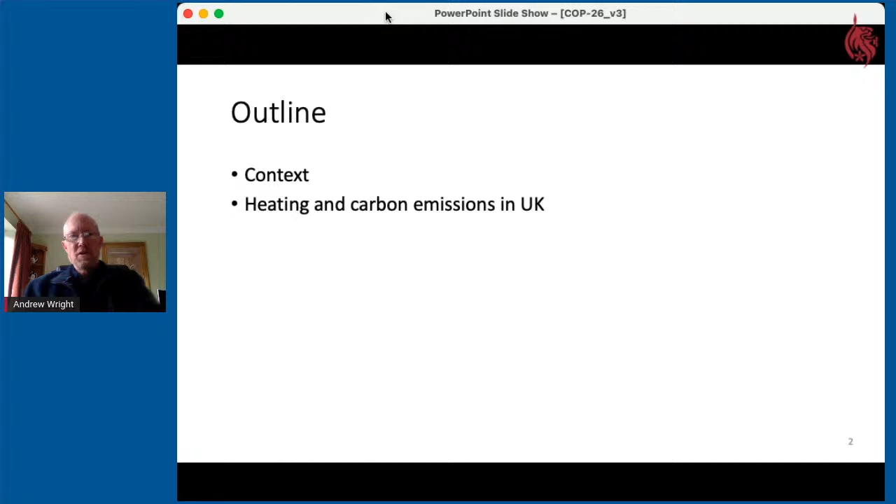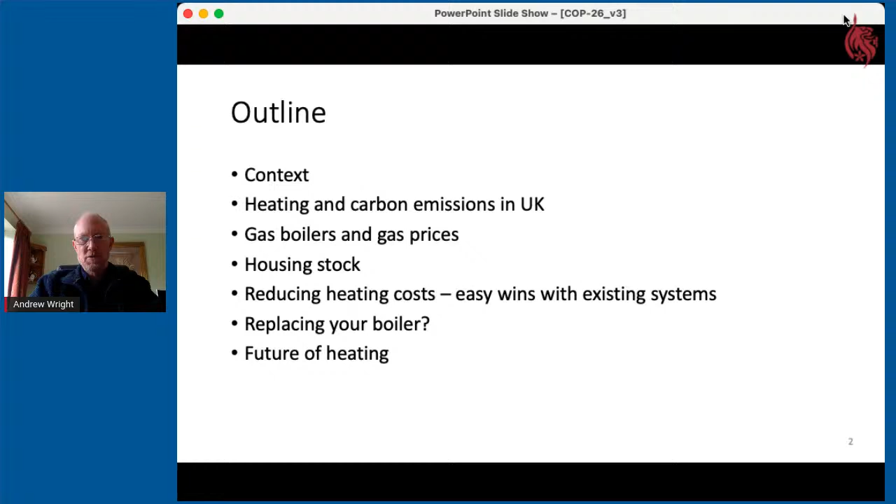First of all, I'm going to talk about the context of all this: heating and carbon emissions in the UK, gas boilers and gas prices (very topical), a bit about our housing stock in the UK, how we can go about reducing heating costs with simple, easy things to do, and the big question of whether to replace your boiler. Then a little bit about the future of heating, possible new systems we may be using in a few years' time.

So to set the context, COP26 starts on Sunday in Glasgow, and there are two big issues here. The first is the fact we have seen, particularly this year, massive impacts of climate change on the world: terrible fires in North America, heat waves in Canada, very dramatic flooding in Germany and China, and other places. So we really are seeing some very worrying and big effects of climate change.

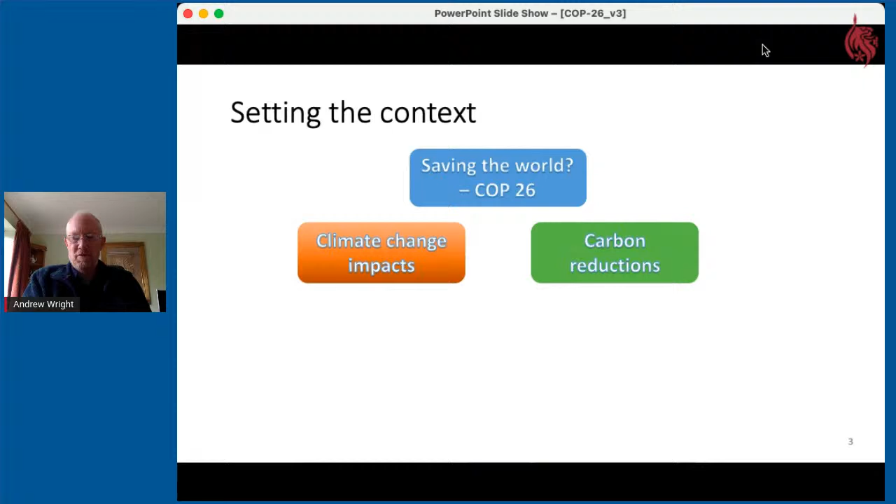On the other hand, in order to limit climate change, ideally to, or at least to, a 1.5 degree increase in temperature if we can, no more than that - but it's not looking very good at the moment. So the carbon reductions needed to reduce the further effects of climate change is a big thing for COP.

And then on the other hand, we have our dependable gas boilers, we have an inefficient housing stock, and we have a massive increase in gas prices in the last few weeks, even since I agreed to do this talk. In fact, I didn't realize how appropriate the title was going to be.

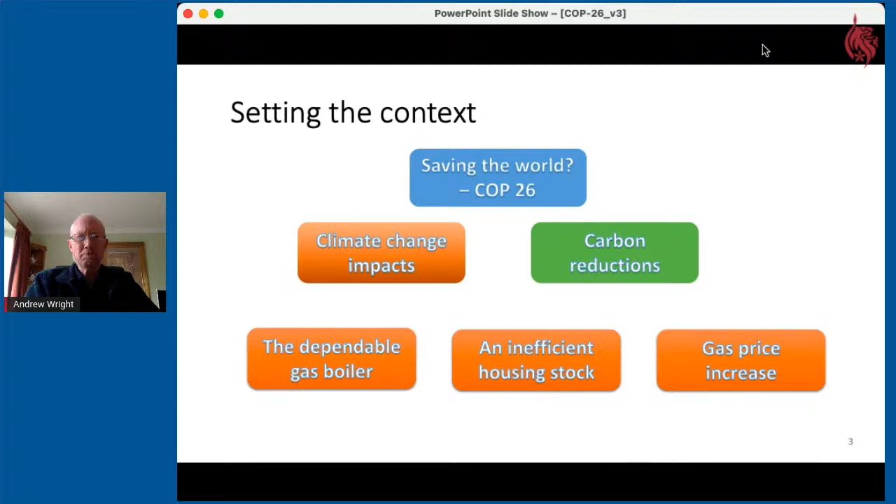So the UN Framework on Climate Change, UNFCCC, has its meeting, the Conference of the Parties, the COP, in Glasgow, and in some quarters it's seen as almost a last chance to agree cuts to limit climate change to 1.5 degrees by 2100.

So climate change is driven mainly by greenhouse gases from the activities of man, mostly carbon dioxide from burning fuels, but also methane and other gases contribute to it as well.

The UK has a target of 78% reduction by 2035 and 100% reduction by 2050, which is really challenging. We just heard, I think yesterday, that the atmospheric concentration had gone up to 413 parts per million. That compares to 280, the long-term pre-industrialization natural level. And despite a slight fall in emissions due to COVID last year, the actual amount in the atmosphere is still increasing.

And a significant part, about 18%, is from buildings, and that compares with 23% transport, 10% electricity, 10% aviation. That's 2019 data, so not influenced by COVID.

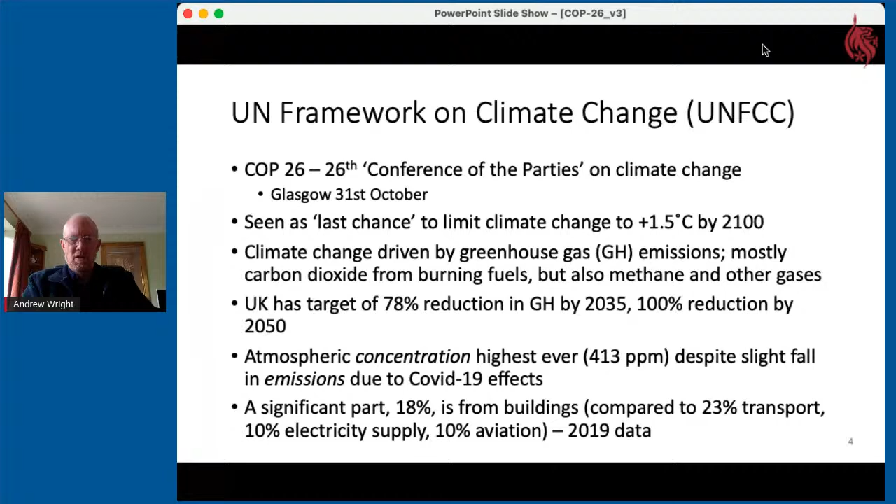If we look at that graphically, the red dashed line is electricity supply emissions, and that has reduced quite steadily and dramatically since 2000, mainly because we've closed coal stations and replaced them with lots of wind generation and a significant amount of solar now.

Buildings, the purple dashed line, is reducing much less, mainly through improved gas boilers and some improvements in the housing and building stock, but that's only reducing slowly and is now 18%. The blue line at the top is transport, which is staying pretty flat, but may reduce quite sharply as we go towards electric cars.

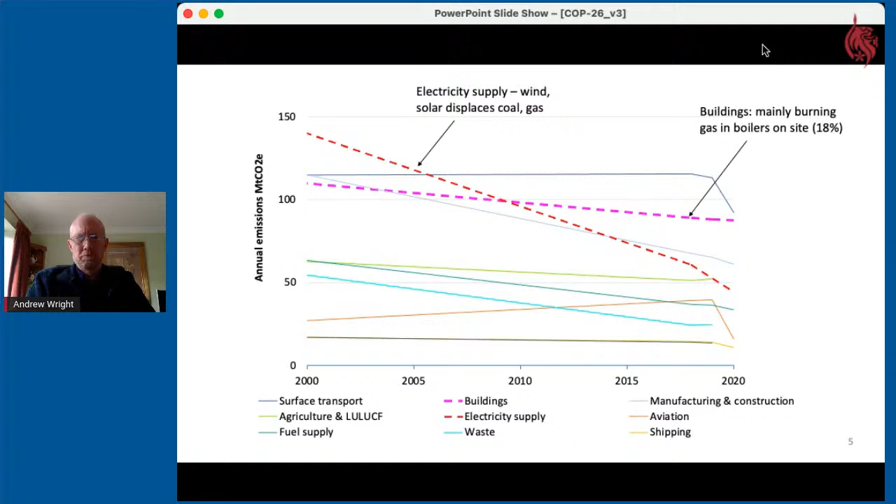If we look at that in terms of our targets, we've come down to a 45% reduction to 2019 from the benchmark of 1990. But to get further is going to be much more challenging - we've done the easy stuff like building wind turbines, and now we come into the really challenging stuff like heating. So those are the targets: 68% by 2030, 78% by 2035, and 100% by only 2050, which isn't really that far away.

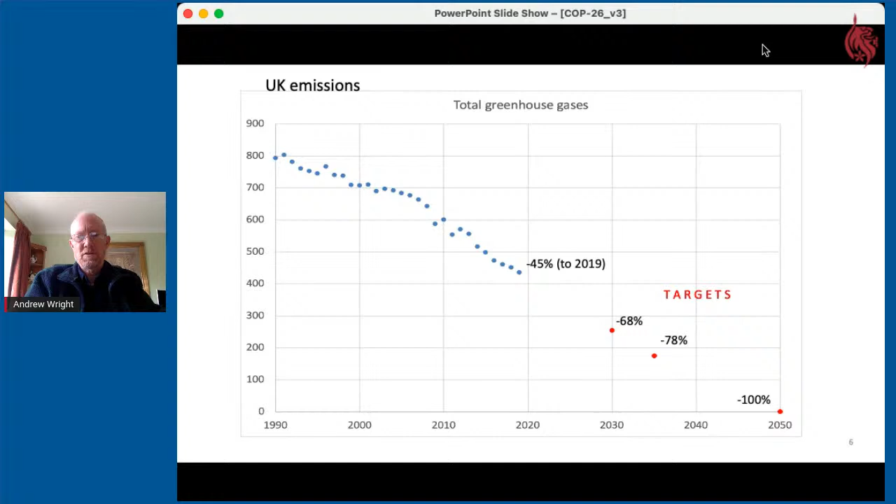So coming on to gas boilers, I think there's about 85-90% of homes use a gas boiler, over 20 million of them in use, and most commercial buildings use gas boilers as well.

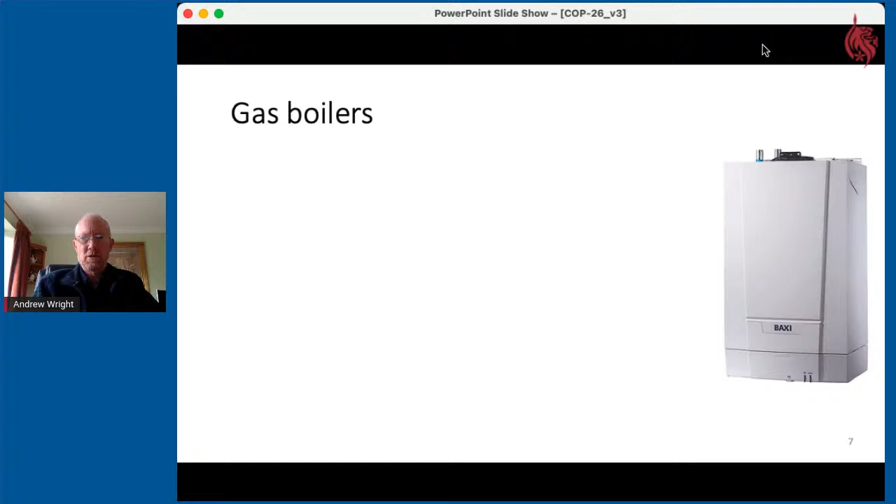They use methane, fossil fuel methane, which is easily transported through the pipe network. Actually, not completely fossil fuel, because now they're injecting about 5% biogas, renewable biogas from sewage plants and so on into the network. So there's a little bit of renewables in your gas boiler, but not very much.

Combustion is efficient, about 80 or 90% in a modern boiler. They provide rapid heating at high temperature, very quick response. Air pollution is minimal if you ignore the CO2, which is harmless as a sort of air pollutant, but obviously contributes to climate change. They basically produce CO2 and water.

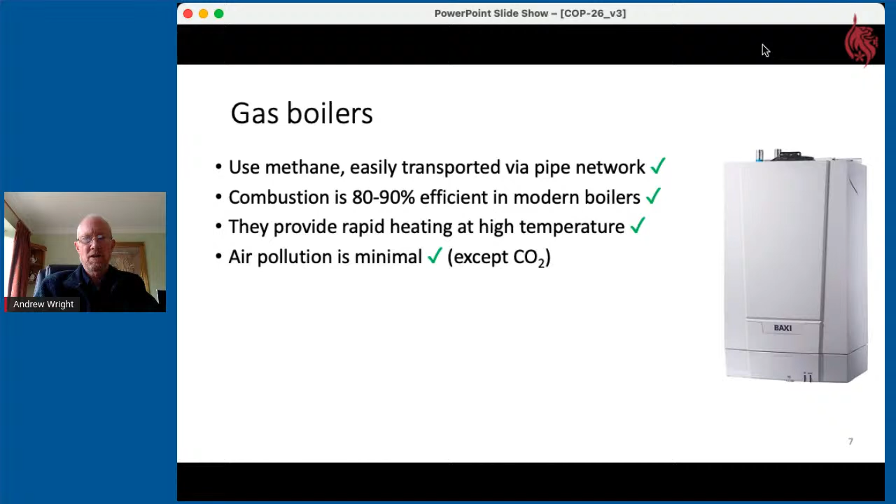Gas used to be very cheap, but it's not looking so cheap anymore. In carbon terms, gas is much better than oil or coal, but still produces carbon dioxide, roughly 0.2 kilograms per kilowatt hour, about the same as our modern electricity supply. It used to be much higher for electricity because of coal generation, but now it's comparable to gas per unit. So to decarbonize, we need to replace most of our methane gas boilers with lower carbon alternatives, which is a big challenge.

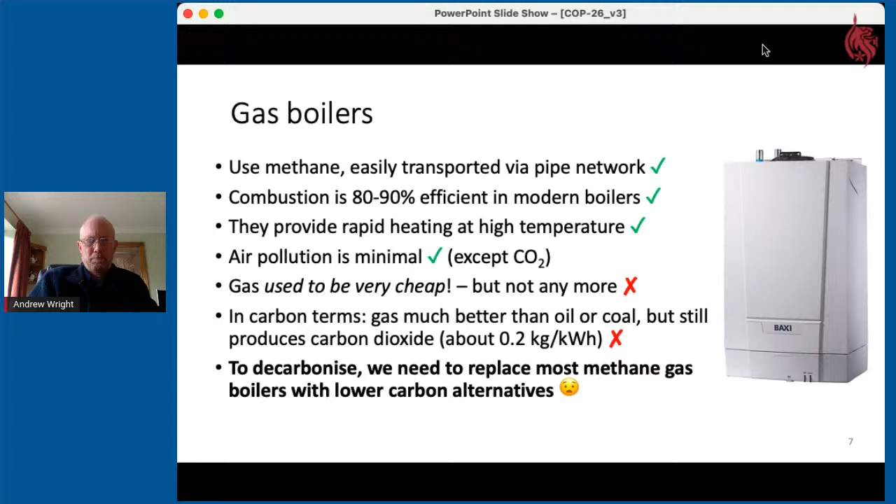This is a graph of wholesale gas prices from the BBC website over the last 12 months. We see it started to rise in about May and has climbed very dramatically since August, from about 40 pence a therm to 258 pence a therm about a week ago, or 1.4 pence a kilowatt hour wholesale to nearly 9 pence. That's an incredibly large increase in price, really dramatic.

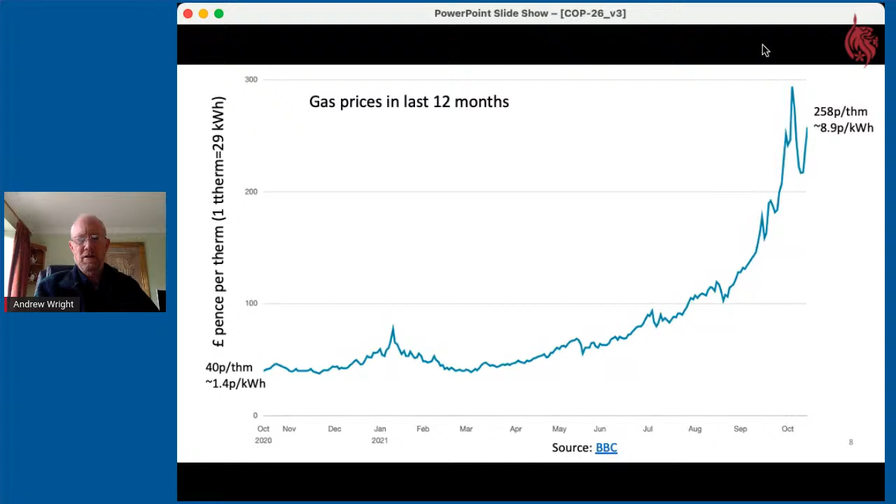Gas prices are about 6 or 7 times higher than a year ago. There are multiple reasons for that, including lack of storage, so we didn't have any sort of buffer of gas stored, geopolitics, COVID recovery, and suddenly increasing demand. China is shifting away from coal, so it's pulling in a lot more of the gas supplies. There are lots of reasons for this.

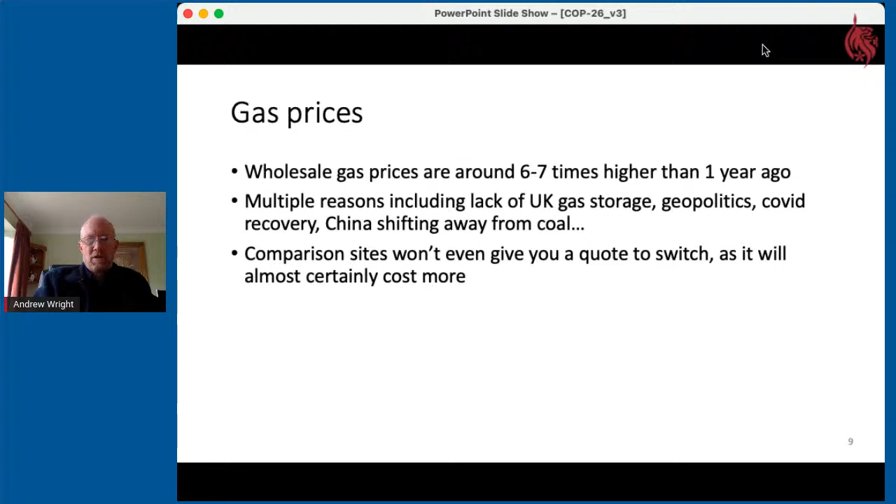I went on a comparison site for this talk to try and get some data on future prices, but in fact they won't even give you any prices at the moment, because they know that your current tariff is bound to be cheaper than a new tariff. So there's no point really looking to switch. This is the message that comes up when you go on Uswitch.

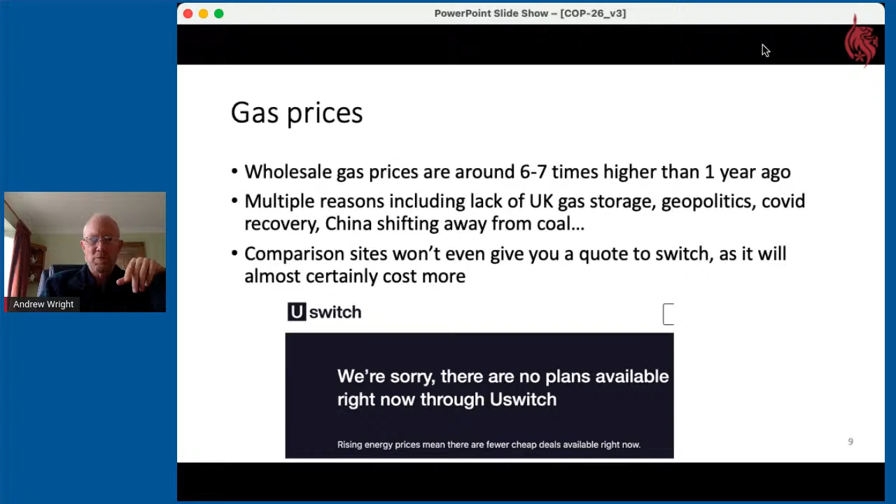But after that, I got an email from my supplier Octopus, because I'm on a 12-month tariff which runs out at the end of November. They were sending me the new tariffs, which are quite frightening.

The left chart shows the prices of gas and electricity unit prices. The blue bar is my current tariff. The orange is the flexible tariff. Grey is a fixed 12-month where I'm guaranteed it won't go up, but then it's a lot higher anyway. Yellow is the community power option, which includes money subsidizing new renewables like wind turbines. If you look at the actual size of those bars, there's a huge increase from the current level, particularly for gas. On the right is the overall annual cost estimated for my home, and the table shows that data in numbers.

If we look at the purple numbers on the right of the table, we've got a 36% increase for the cheapest flexible tariff, a doubling or over-doubling to 205% for the 12-month tariff. And if I went for the community power option, which I don't think I will, it's 3 times the cost, going from just over 1,000 a year to over 3,000 a year. These are really, really big increases, much larger than I think I can ever remember happening to energy prices.

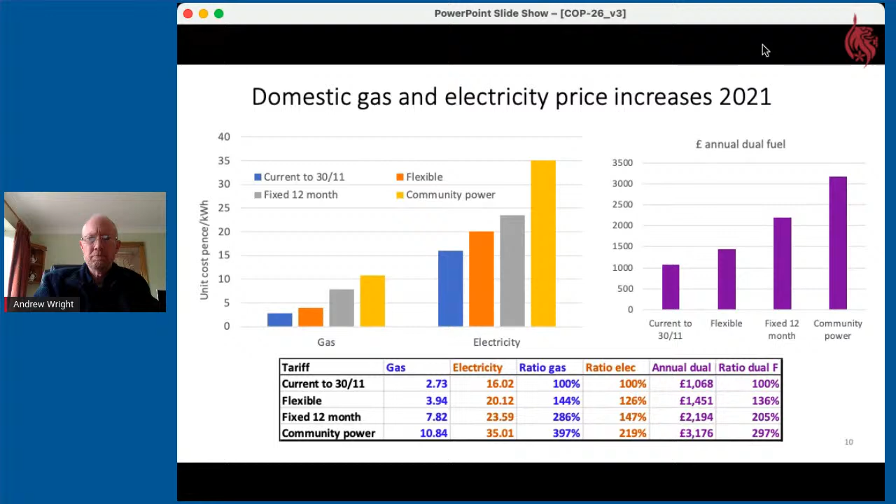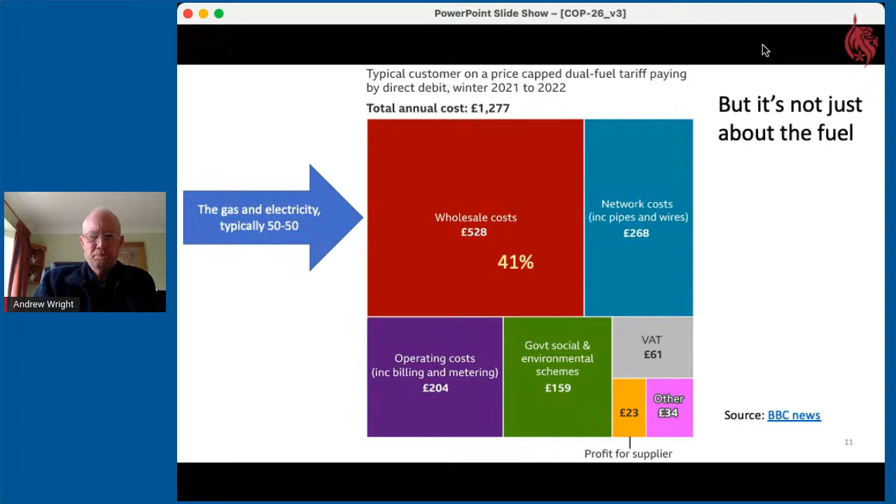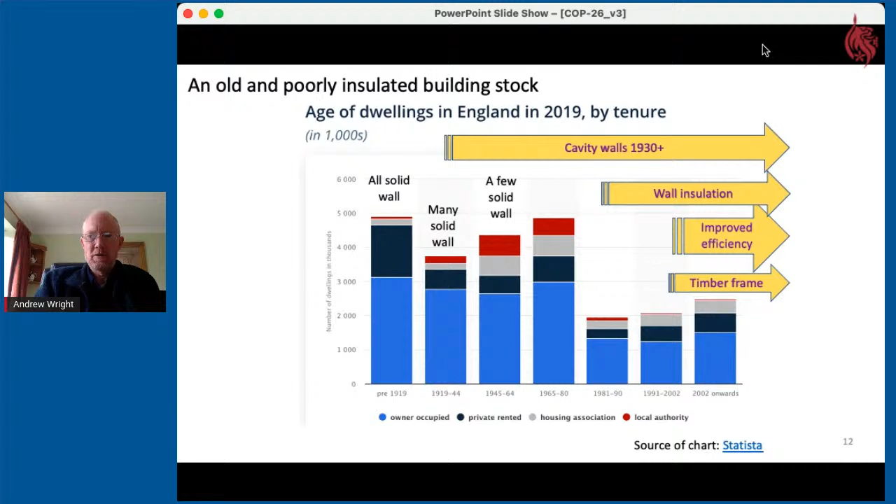I'd like to move on now to some short-term, free or low-cost solutions, which mainly apply to gas or oil central heating, but some will apply to any system. These are things you can do very easily: looking at when it's needed, where it's needed, how much is needed, whether to use gas or electricity, and spaces and sun.

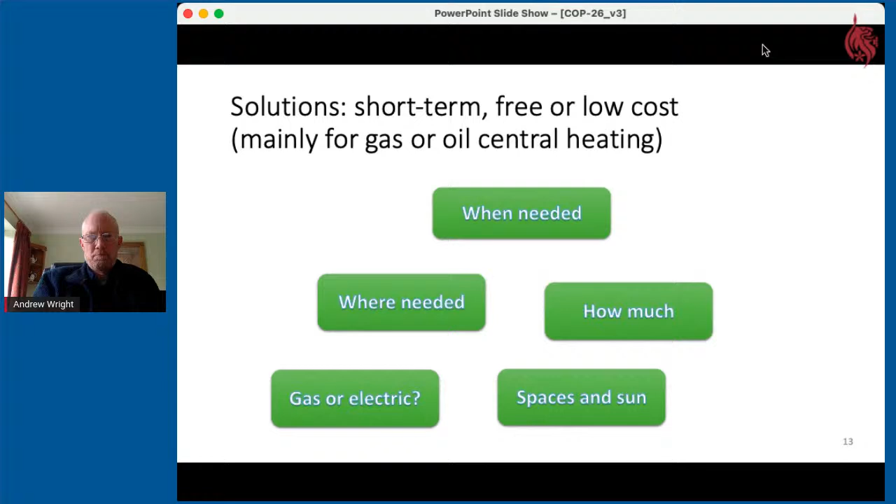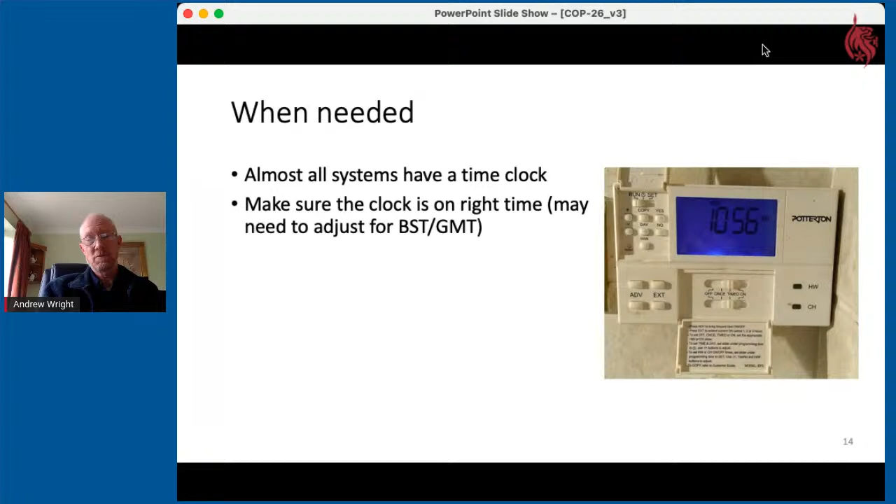First of all, when it's needed - almost all systems have a time clock. If you haven't got a time clock, you definitely need to get one. Most look something like this, or a more modern version. First of all, make sure the clock's on the right time - it might have drifted. And remember you need to adjust for summertime and wintertime. On Sunday night, I shall be adjusting my clock here for the hour change.

Make sure the heating isn't on 24 hours a day, which is probably just the 'on' setting. Make sure the on-off times fit your lifestyle - when you get up, when you go to bed, when you're around in the daytime or not. Weekends are probably different from weekdays. Adjust the times seasonally too - in the autumn and spring you'll need less heating, so it could come on later or go off sooner. You can make adjustments which will save you some energy.

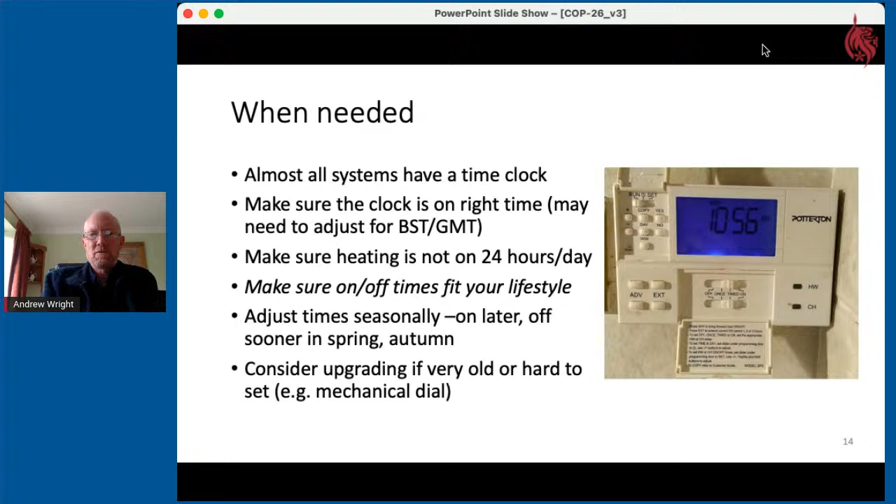And if you've got a very old or difficult to set time clock, then consider upgrading. It's quite cheap, because it's just swapping out the box for another box - there's nothing else involved.

So we come on to where it's needed and how much. First of all, only heat the rooms you use regularly. You might want to maintain some heat in a room that's empty, because in an old house, particularly with solid walls, it may get quite damp and damage the fabric if you have no heating at all in cold weather. Turn on heating in rooms used just occasionally, just when you need it, not all the time.

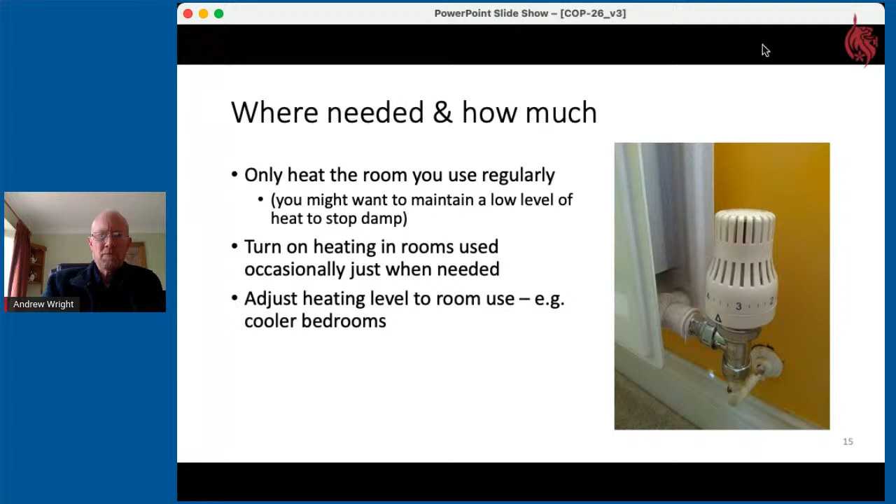Adjust the heating level to the use of the room. So for bedrooms, often people have it cooler than other rooms - just turn it down to a low setting, or even off if you can. And adjust clothing - I'm wearing a warm fleece in this room to reduce the heating need.

These TRVs, thermostatic radiator valves, are a really good investment if you haven't got them in all rooms. Very, very efficient, very effective, and a great way of reducing heating use. There'll always be at least one radiator without one, because the system needs a sort of safety valve - if all of them shut down because it's warm, one has to stay open to let the water flow around the system.

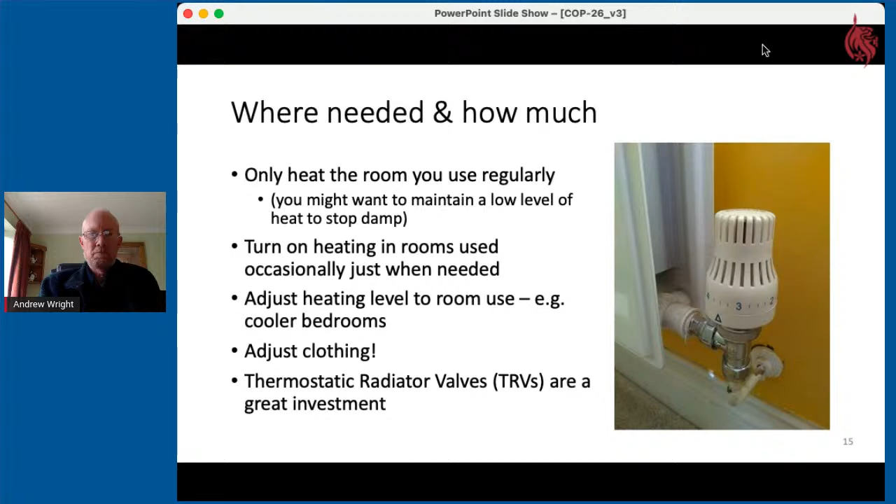But a very good investment. There are two other thermostats on a heating system. One is the return temperature, on the left. This is my rather old boiler, which is manually set, and that controls the return water temperature to the boiler, usually between about 50 and 70 degrees. If this is set very high, it means you have very hot radiators putting too much heat in, and it's a fairly inefficient way to run the system, particularly in warmer weather. So you can turn it down to the right setting so you're not getting very hot water in the radiators, as long as that's enough heat. Also, if you have a condensing boiler, that needs to be as low as you can, to be cool enough to condense the steam out of the gases that are burnt.

On the right, or in the middle and right, we have the room thermostat. The middle one is an older one. This is mine, which is in the hallway, and it just controls the entire system. Once that reaches a set point, it will turn the whole system off until it cools down again. That's definitely worth having - most systems will have it anyway, and it avoids overheating the house when you don't need to.

On the right, we have the digital version of that, which combines the room thermostat in the middle with the time clock I showed earlier. So there are buttons you can press to set time on, time off, and so on. This is called a programmable thermostat - it combines those functions, but make sure they're set to the right settings.

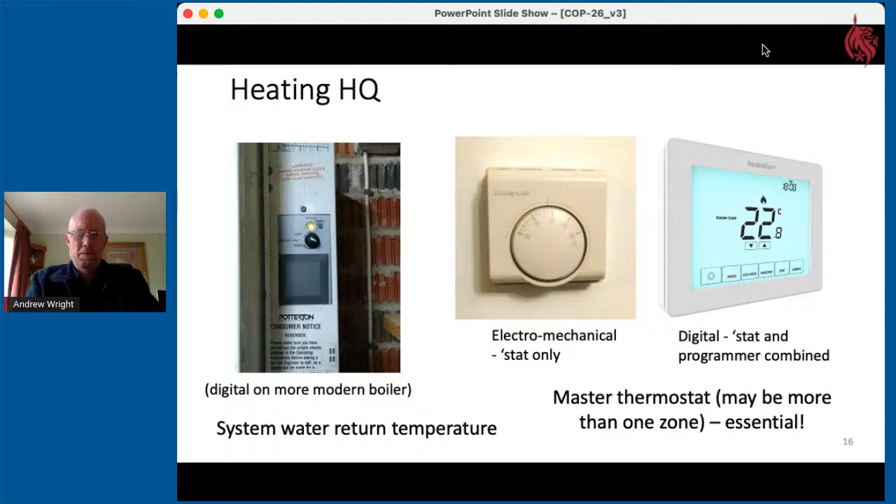Then we come on to whether to use gas or electricity. You might think gas is always better because it's cheaper, but in terms of carbon, electricity used to be much higher, about 2.5 times more than gas. But because of all the renewables, now on average it's about the same as gas. So you're not saving carbon by using gas instead of electricity. And in fact, if you're buying electricity with a renewable tariff, it'll be zero carbon energy anyway.

Electric heating is 100% efficient. All the energy that goes into that device turns into heat, and it's a very quick response, so it's a very effective heating system. However, the price of electricity is 4 or 5 times more than gas, even with the increases, because electricity will go up as well. The relative costs might be slightly different, but both will rise. It's always going to be more expensive, and that's why we use gas.

So heating one room with electricity may well be cheaper and lower carbon than running the whole central heating system in the whole house. For example, one person working at home - electric heating one room is probably better than heating your whole house. Do make sure it has a thermostat, otherwise it's inefficient.

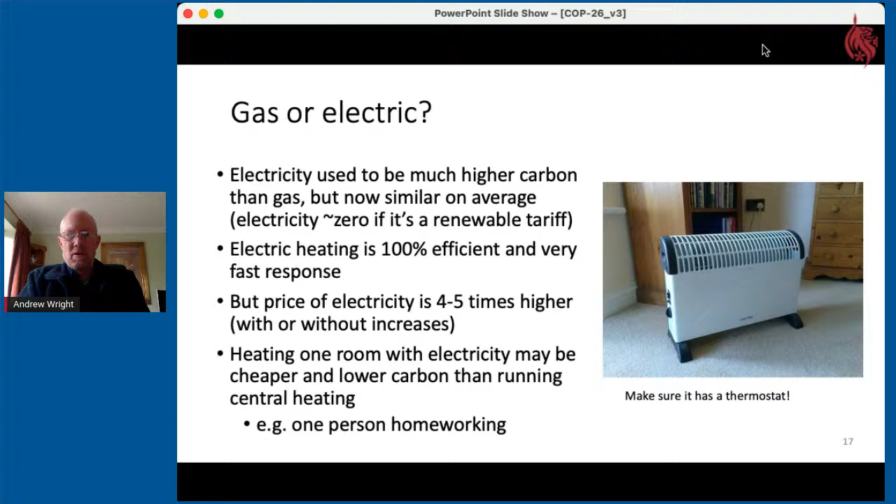And then finally, spaces and sun. Make use of the sun - it's free, it's a big source of heat. The sun will warm rooms significantly, even in winter. In fact, solar gains can be higher in a room in spring and autumn than in summer, because the lower angles mean more heat is getting into the room around this time of year. You can get quite a lot of heat coming in from the sun. So consider using rooms with sunshine, south facing for example, to work in and have a warmer room.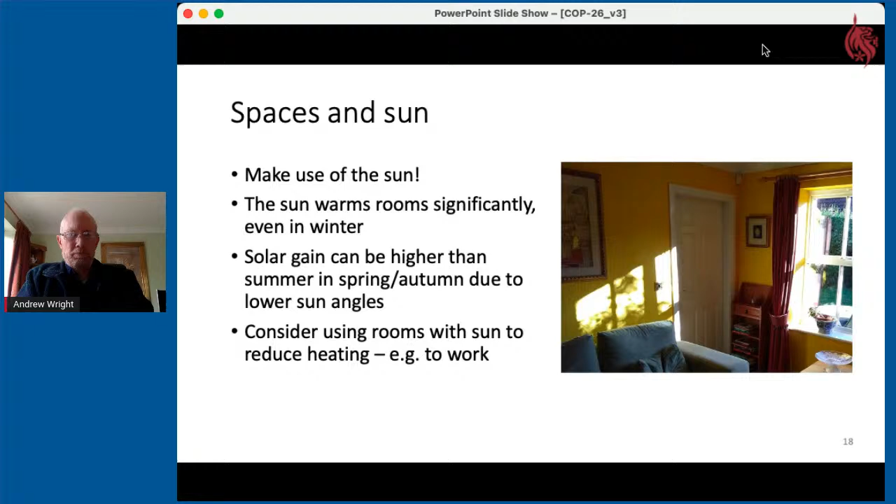So moving on to the question of whether to get a new boiler. This is a question I'm actually wrestling with at the moment, because mine is fairly old, but it's a really tricky one.

If your boiler is more than 20 years old, it probably is not condensing and is probably around 75 or 80% efficient - could be as low as 60% if it's a very old boiler. A condensing boiler is about 90% efficient if the return temperature is 55 degrees or less, which means the heat exchanger in the boiler is cool enough to condense out the water from when you burn the methane. When you burn methane, you get carbon dioxide and water vapor. If you have a hot return temperature, that water vapor stays as vapor and goes out through your flue. If it's a bit cooler, it condenses onto the heat exchanger, turns back to liquid water, and releases its heat - that's how you get the extra 10% efficiency, provided you've got the right temperature setting.

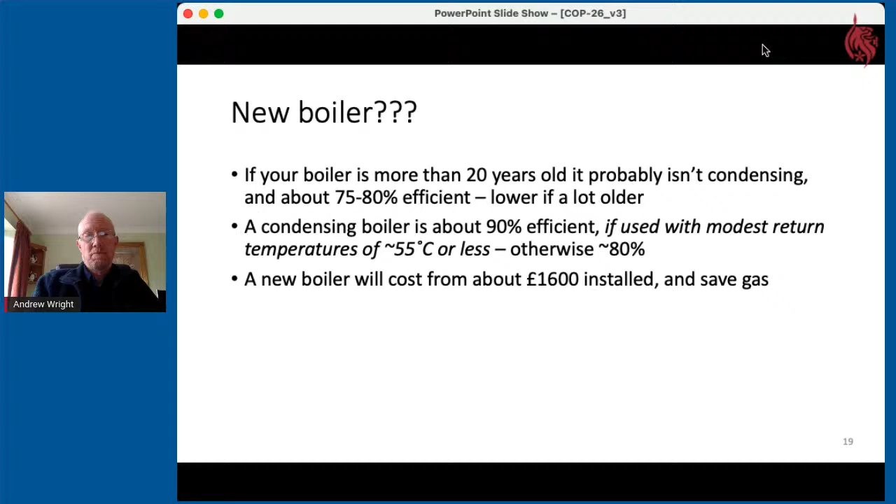A new boiler costs around £1,600, which is pretty cheap really, and will save you gas and cost, assuming it's an inefficient one being replaced. But the government has a longer-term aim in its new heating strategy, published about a week ago, to phase out gas boilers altogether. They've rowed back a bit from the original idea that they would be illegal, to saying their ambition is to phase out installation of natural gas boilers, a gradual transition - no one will be forced to remove existing boilers, and so on. So I think they recognize the difficulty of just saying you can't have gas boilers, because there are a lot of challenges in the alternatives, as I'll come on to.

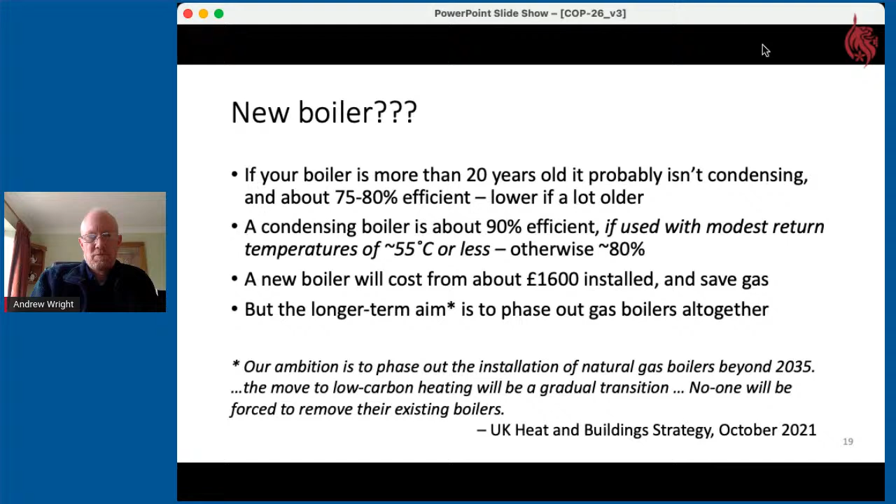So now moving on to longer term replacements to methane gas boilers. For any of these, it's really important to minimize heat loss first, i.e. through insulation and better air tightness and so on, which will reduce the capital cost of a probably fairly expensive system and the running cost as well. So look at the fabric of the building first before looking at other options.

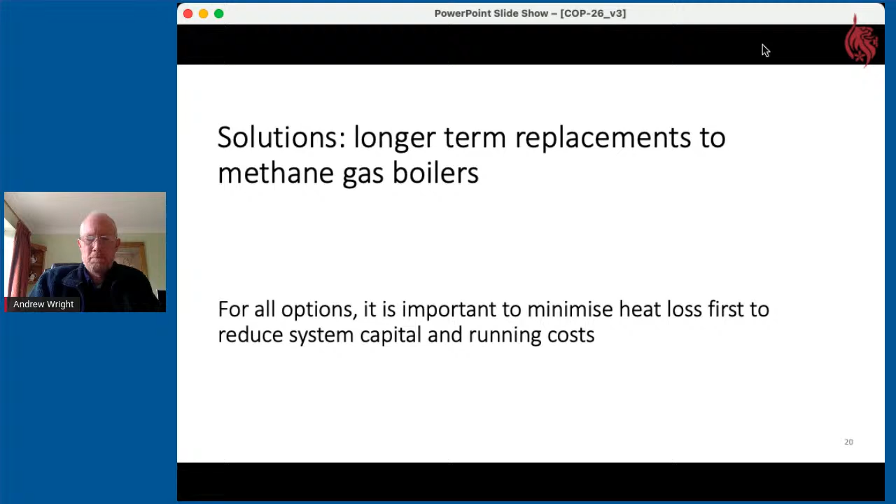So hydrogen, we've heard a lot about hydrogen recently, and I suppose I'm a hydrogen skeptic in some ways. Hydrogen is clearly a zero carbon fuel. When you burn methane, you're basically burning carbon and hydrogen together, hence producing carbon dioxide. When you're burning hydrogen, you're just burning hydrogen, which produces water.

It's easy to make hydrogen. You just split it with electricity, splitting the molecule of water into hydrogen gas and oxygen gas, which is about 80% efficient. If it's made with renewable electricity, that's called green hydrogen. If it's made with natural gas, methane, it's called blue hydrogen. It's the same gas, of course, it's just the way it's made.

It can be burnt like methane, or it can be used in a fuel cell, which is a kind of reverse process which produces water, electricity, and heat. It can be compressed and stored, but it does take energy to compress it, significant energy. It can be put in vehicles, which use fuel cells to make electricity to drive a vehicle. And that will probably make sense for vehicles like trucks and trains, which are too big and heavy to carry massive batteries.

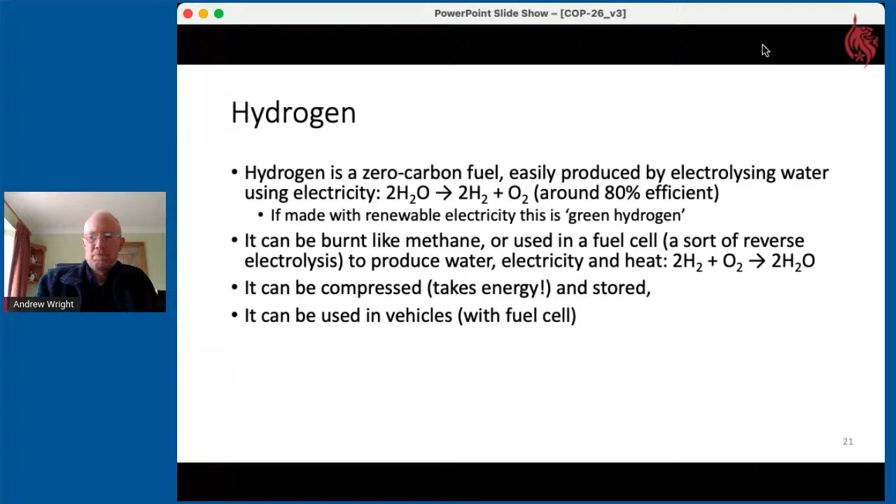And it could replace methane in modified gas boilers. Remembering the town gas that I can just remember as a kid, we had town gas before natural gas came in, was actually about 50% hydrogen. So we've been here before, in a sense, although that was made from coal, so it was very, very high carbon.

But if we just use it like that for heating, it will be an incredibly inefficient process and a very expensive use of renewable electricity. It might be relatively easy to do it, we just maybe modify or replace our boilers and kind of carry on burning hydrogen. But if you think about the energy involved, if you start with 100 units of electricity, you get 80 units of hydrogen out because of the efficiency of that transformation. You burn it and you may need to compress it and then transport it, may lose another 10%. And then you burn it in the boiler and lose another 10%. So you might be looking at 60% of your original electricity turning into heat. Well, you might as well just use electricity, an electric heater. There's no point going through that expensive and wasteful process to get to heat.

It certainly has a role in other things like possibly aircraft and transport, but not, I think, as just a replacement for methane.

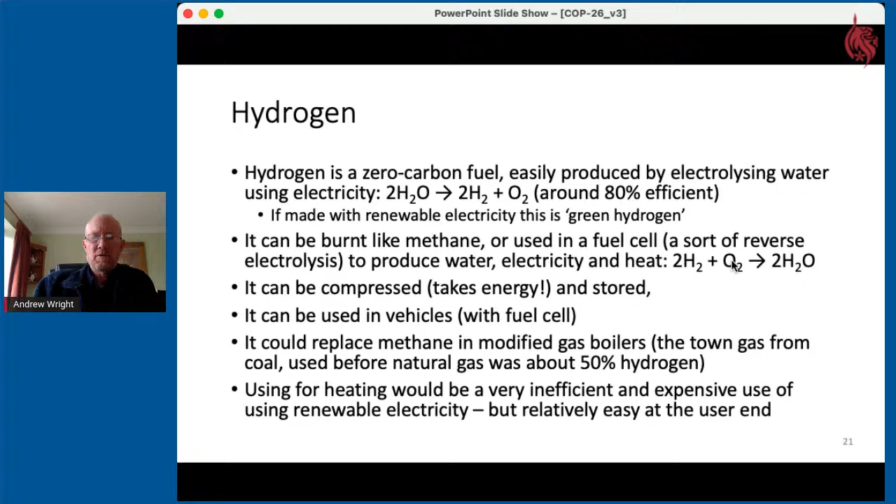So moving on, heat pumps. We're all familiar with heat engines, which move heat from hot to cold, essentially to produce mechanical energy, such as a steam engine, petrol engine, gas turbine. A heat pump is simply reversing that. It's using mechanical energy to move heat from cold to hot, against the natural flow of heat from hot to cold.

And the mechanical energy to make that happen is provided from an electric compressor. It doesn't have to be electric, but it always is because it's just the easiest way to do it. Air conditioners, refrigerators are heat pumps, but they're extracting heat from inside to outside. For buildings, a heat pump normally refers to moving heat from outside to inside in winter. Some are reversible - they're quite common in some countries where they have cold winters, warm summers, so they just have cooling in the summer, heating in the winter. But often in the UK, they'll just produce heat in one direction.

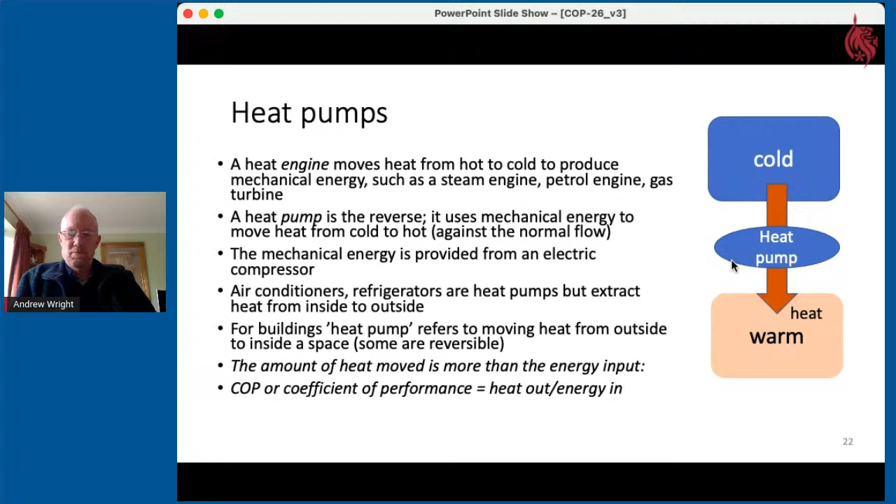It's very important to understand that you're only moving heat, you're not just using electricity to make heat. So the COP, coefficient of performance, which is the ratio of heat out to energy in, is greater than 1, usually around 3, 4, 5, possibly more. Hence, they are energetically, in a sense, more than 100% efficient, because they're just moving heat. They're not just like a boiler, just taking energy and turning it into heat.

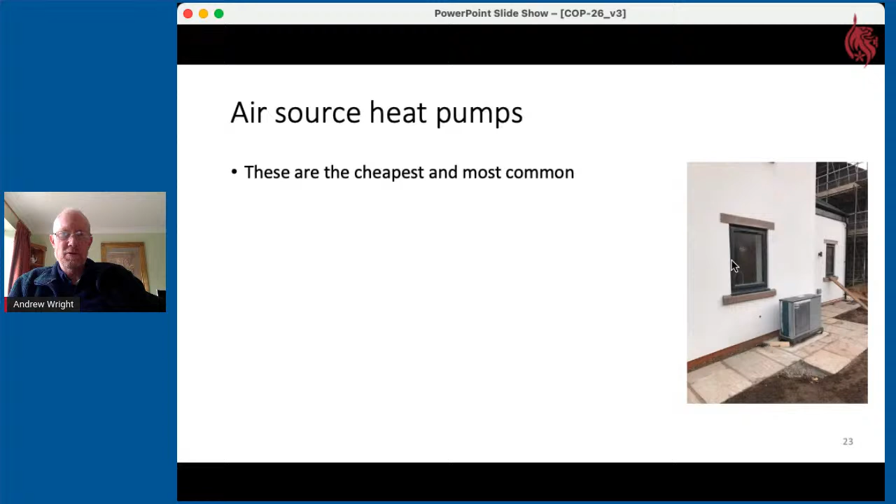So there's two main contenders for heat pumps for the UK. First is air source. This shows an outside unit, which is the bit that collects the heat from the air. So there'll be a cold coil in there, which is absorbing heat when the fan blows the air over it to absorb the heat, and then taking it inside the house, and then boosting its temperature to a higher level. So these are the cheapest and most common systems. We have the outdoor unit extracting heat, and the heat pump will turn it into hot water or hot air with a COP of about 2.5 to 3. So 2.5 or 3 times the electricity input is heat.

Cheapest systems are not cheap. They're £4,000 to £8,000, something like that. So double or more the cost of a new boiler.

The prices will probably fall as the market grows. We're at a fairly early stage of the market at the moment, but they are inherently quite complex systems.

And because we're using low carbon electricity and then multiplying it by the COP, it means the carbon content of the heat is much lower than a gas system.

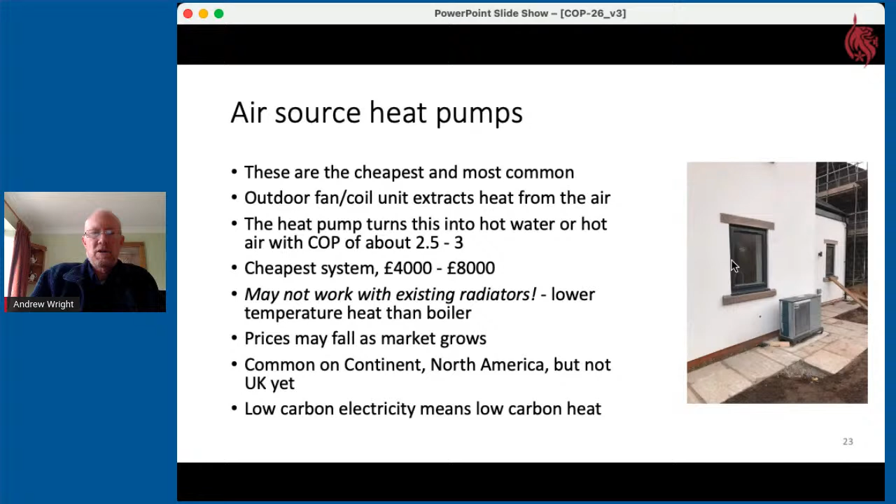The other one is the ground source heat pump, where we're using heat from the ground. Exactly the same principle, essentially a very similar device for the actual pump part itself, but the heat is coming from pipes buried in the ground.

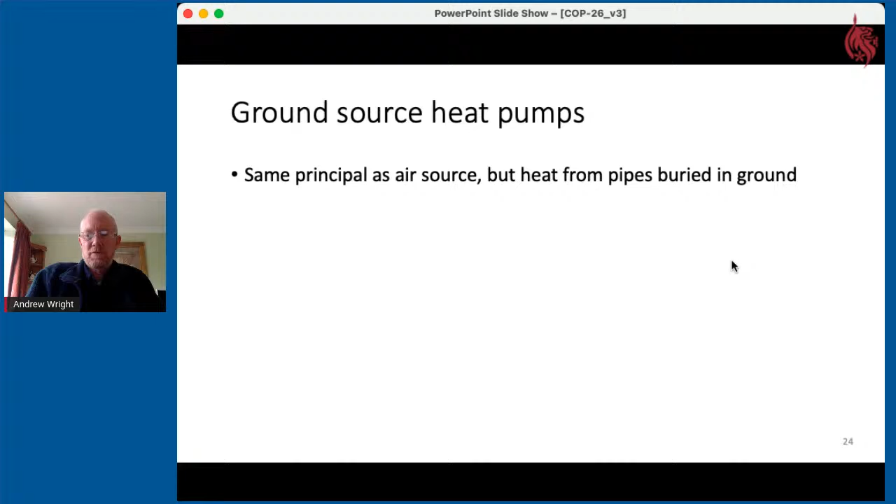You pump brine, salt water, around the system to collect heat from underground. That may be a horizontal pipe, or more normally a vertical pipe, which can be as deep as 100 meters underground. It's a lot more expensive to install than an air source system because of the drilling costs and all the pipes, and it doesn't work on all soil types.

Below the soil you obviously have rock. Some rock types aren't very good because they insulate too effectively, and the heat can't flow into the pipes fast enough to work effectively.

The ground is warmer than the air in winter, something around 10 degrees versus something averaging around 5 degrees for the air. So they're more efficient, because the smaller the temperature difference, the more efficient the system is. It's easier to get heat from 10 degrees and boost it up to 50 than take it at 5 degrees and boost it to 50.

So the COP is higher as a result, typically 3 or 4 instead of maybe 2.5 to 3.

Typical costs are a bit frightening: £15,000 up to £30,000. It varies a lot depending on the size of the property, the ground conditions, and the site access for the drilling, among other factors, but it's a lot of money.

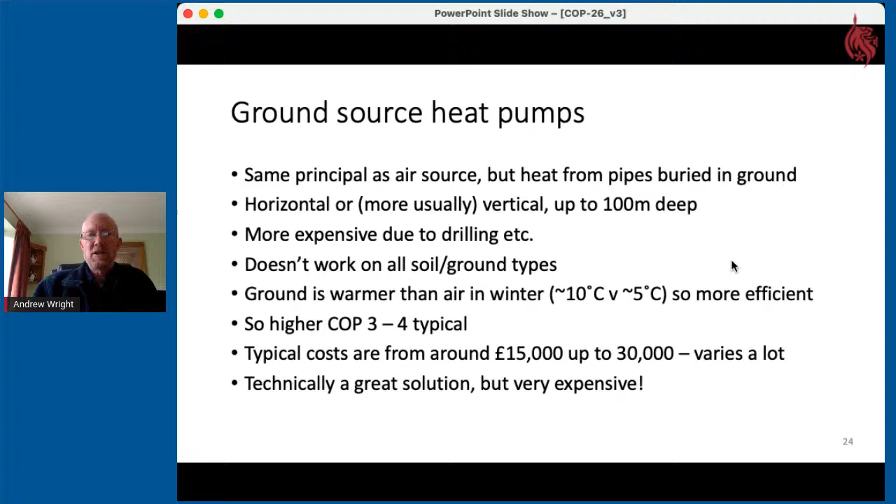There are some other options. Simple direct electric heating, which is really cheap and simple but very expensive per unit. District heating, which only works when you're on a district network, but that's quite common on new developments, and city centres often have district heating, including Leicester.

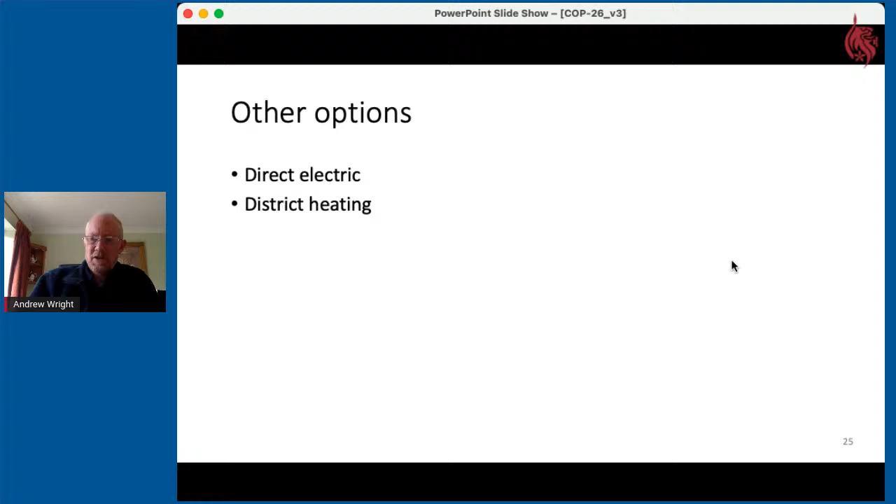Solid fuel stoves got a very bad press a few years ago because of air pollution. If it's a renewable and clean burning fuel with an efficient stove, it is an option, but they're only likely to heat one room, so not a sensible solution for a whole house.

And then there's looking on the demand side, just making your home very efficient. Really, this is mostly about new build: Passivhaus standard, with really high levels of insulation and air tightness, will almost eliminate the need for heating and bring it right down, in which case direct electric may be fine because you're using so little of it.

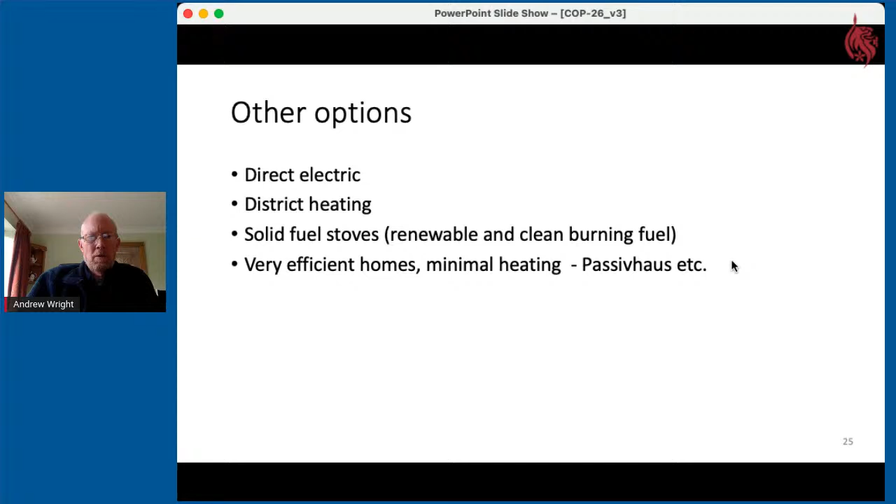The controls are more complicated. So we are moving towards a better controlled and more intelligent, but more complicated, future for heating.

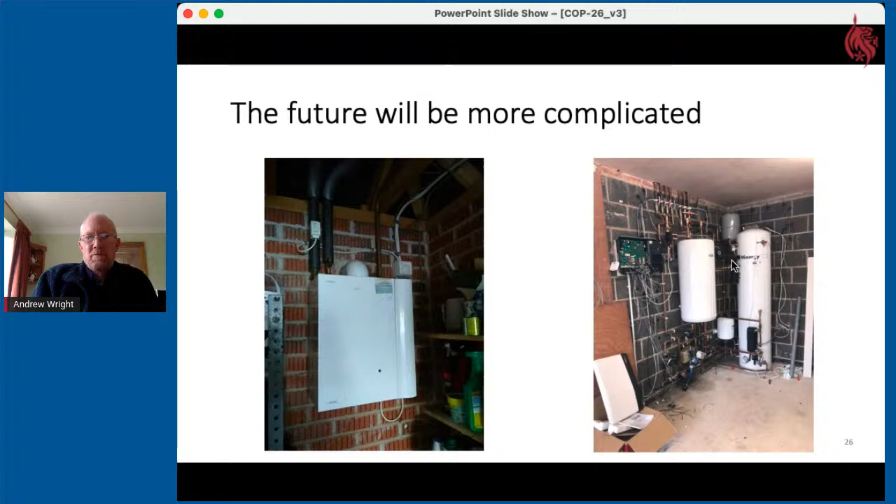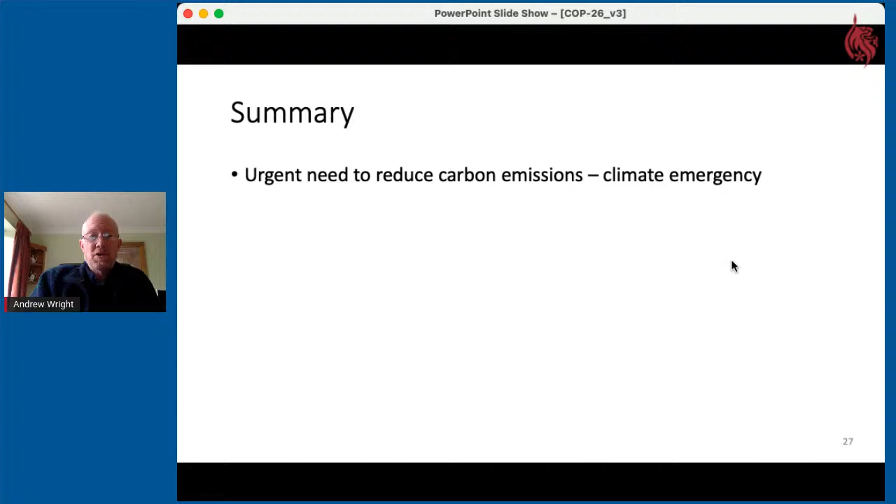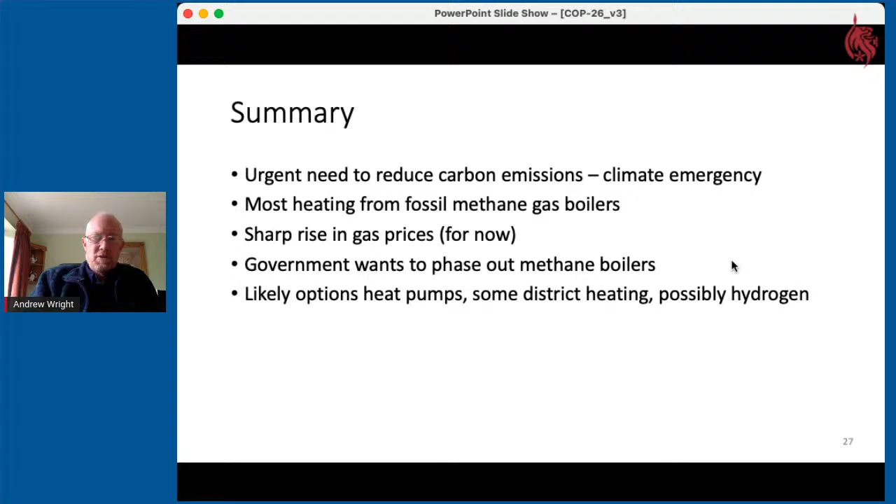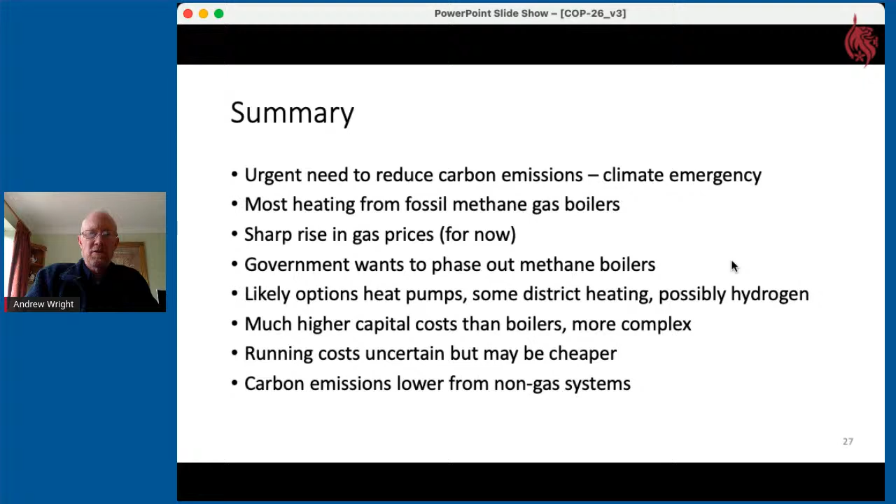So to summarize, we have a real climate emergency and a need to reduce carbon emissions. Most heating at the moment is from fossil methane gas boilers. We've seen a very sharp rise in gas prices, for now at least, probably in the future as well. The government wants to phase out methane boilers. Likely options are heat pumps, probably some district heating, possibly hydrogen, but I'm pretty skeptical on that. Whatever system we move to, the chances are it'll be a much higher capital cost and a more complex system. Running costs are somewhat uncertain, but probably cheaper or comparable to gas going forward, depending on lots of factors, though unlikely to be a lot more expensive. Carbon emissions will definitely be lower from the non-gas systems, mainly because we've decarbonised our electricity to a fair extent. That's it.

Do we have any questions?

There's a comment saying, are heat pumps the future? Well, as I outlined earlier in the talk, to some extent yes. I think they're the biggest contender for heating. There are some other options, but they're likely to be the main way we heat.

Can a smart meter help reduce your energy usage? That's a really interesting question. We actually did the analysis of about 29,000 homes' data. About half had smart meters for a large utility, one of the big six, some years ago. The idea from the government was that by having smart meters we'd all save, I think 10% was the number floated around. In fact, the savings were almost statistically undetectable, because a smart meter itself is just a meter. It doesn't save you any energy at all. The idea was that by having feedback to households, people might use less energy. I think the short answer is no, or a very small amount possibly. If you notice you're wasting energy, perhaps you might notice on your monitor.